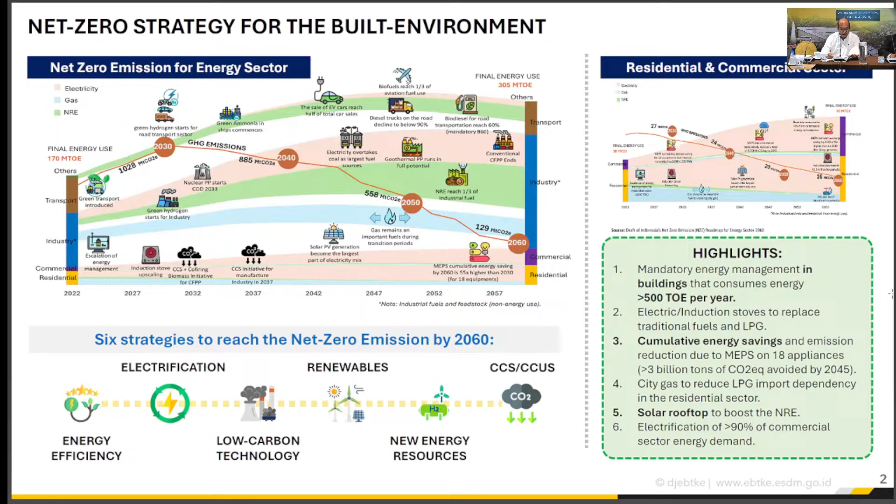This commitment is backed by our national policy roadmap, including the enhanced NDC, which outlines an ambitious emissions reduction of up to 31% by 2030, at which the energy sector is expected to contribute significantly, reducing emission to 129 million tons CO2 by 2060.

To operationalize these goals, the government has enacted Government Regulation number 33 in year 2023 on energy conservation, followed by Ministerial Regulation number 8 and also number 3 in year 2025, introducing mandatory energy management for buildings consuming over 500 ton oil equivalent annually.

On the green building side, we have Government Regulation number 16 in year 2021 and Ministry of Public Works Regulation number 21 year 2021, mandating energy and water efficiency standards for buildings larger than 5,000 square meters. These are not just regulations, they are cornerstones to building a resilient and efficient urban future, especially for dense cities like Jakarta.

Looking ahead, the concept of the net zero energy building may become an alternative solution for the building sector, particularly for the non-residential areas. The application of net zero energy building means significantly reducing annual energy consumption while maximizing renewable energy generation without compromising comfort and building function.

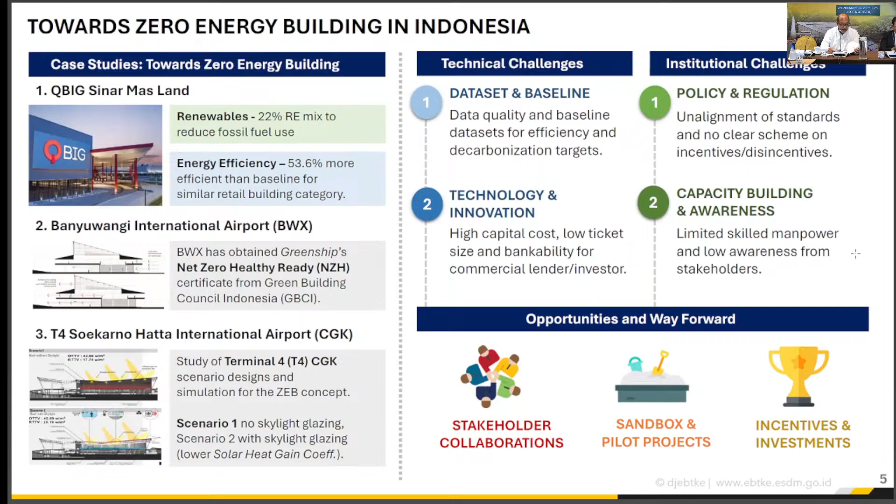Lastly, we hope this seminar will mark an early step toward all of those directions. Moreover, we hope that it can also address the challenges in capacity building and awareness by enhancing education and outreach, especially to the local government, commercial building owners, and other relevant stakeholders. Let this be our platform today to discuss further about zero energy building as a future possible option to decarbonize buildings across Indonesia. Thank you again for your engagement and collaboration. I look forward to the fruitful discussion. Thank you very much.

Thank you, Pak Hendra, for the wonderful remarks. Next, we are honored to be joined virtually by Mr. Masaki Kamiura from METI Japan, who will also share his remarks. Mr. Kamiura, the screen is yours, sir.

Hello, good morning. Can you hear me? Yes, clearly. Thank you very much. I'm Masaki Kamiura, Assistant Director for International Affairs Division, METI Japan. Today, Director Yoshino was scheduled to give this speech here, but since Director Yoshino is in the process of handling other official business, I will make an intervention on his behalf.

First of all, I'd like to express my sincere congratulations on this workshop, based on the various cooperation on energy efficiency and conservation between Indonesia and Japan. At the same time, I'd like to express my sincere gratitude to the Ministry of Energy and Mineral Resources, the Ministry of Public Works and Housing, and the City of Jakarta, Indonesia. Thank you for supporting this workshop, as well as all speakers and participants and all those involved in organizing it. On behalf of METI, I'd like to say a few words for these opening remarks.

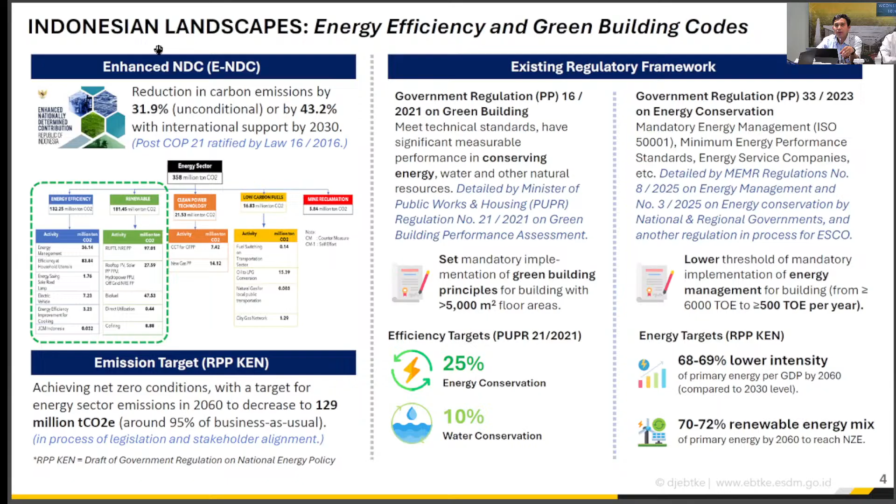We also have another government regulation on green building, which may have a different approach, like the principle with floor areas, different from our approach. It means that if we calculate the energy with PUPR, they calculate the floor areas, but the two regulations should hand in hand, so it should be aligned together to achieve the energy efficiency target.

Next slide. In terms of energy efficiency regulations, we have also established government regulation number 33 2023, that consists of a lot of programs, including energy management, minimum energy performance standards, implementation of energy service companies, and also how to encourage the participation of the private sector, maybe for funding, capacity building, and also research and innovations and partner collaborations. With this regulation, of course we also have monitoring and evaluation in terms of the building sectors.

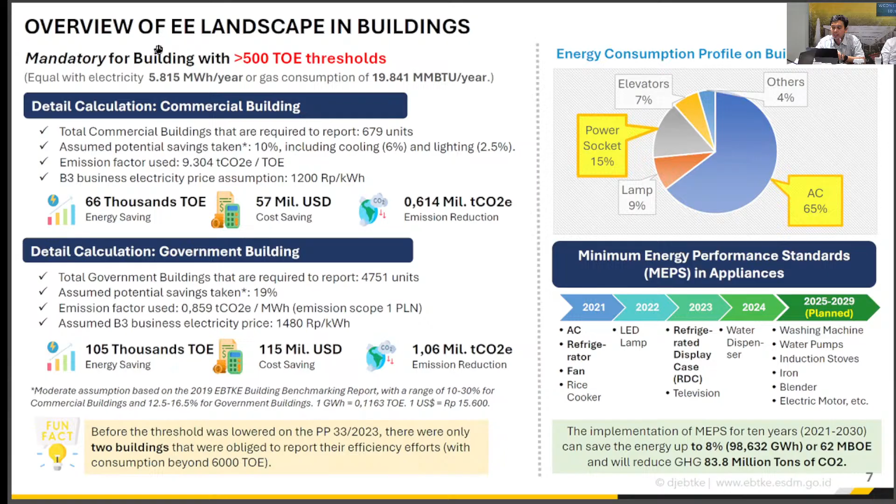In tapping into this potential savings, we need to identify practical solutions to mobilize clean energy financing, including through the promotion of energy service companies, or ESCO. The presence of ESCO hopefully can assist companies in performing the investment grade audit, encourage energy efficiency project financing, implementation, operation and maintenance, and measurement and verification of energy performance. We also encourage the development of energy service companies.

And in 2024, there are some ESCO companies here that already collaborate with us. Next slide.

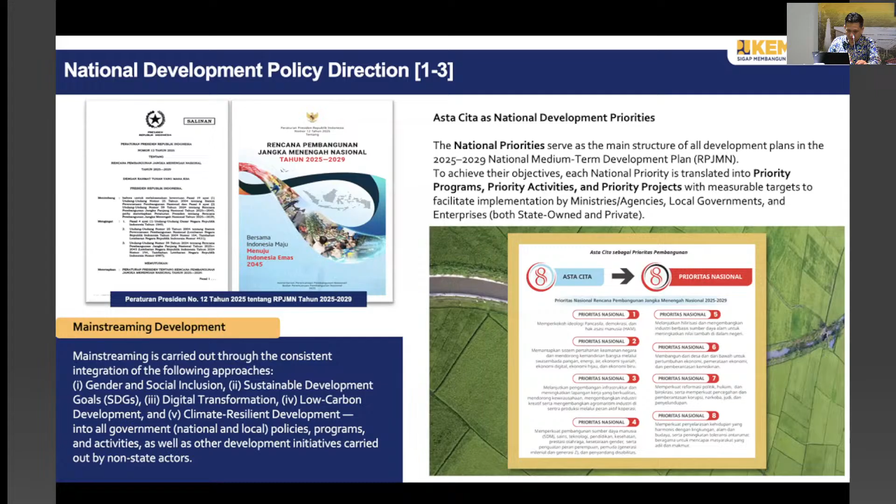In National Development Policy Direction, in support of national priority, six medium-term development targets have been formulated to help ensure success during the 2025 to 2029 period, one of which is realization of green economic transformation.

In the 2025 RPJMN development matrix, green building implementation is listed under priority project, which we call PROP: project priority implementation of sustainable construction and green buildings. Green buildings are part of the national strategy to support the transition toward green economy and low carbon development. They serve as an implementation instrument to realize a green economy and low carbon development, promote resource efficiency and energy conservation, reduce greenhouse gas emissions from the energy sector, and promote sustainable construction in Indonesia.

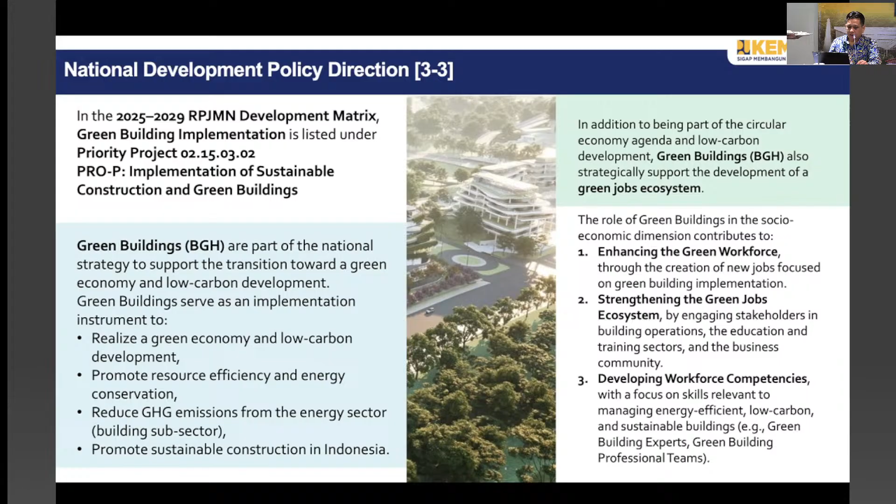In our regulation, as mandated by government regulation number 16 year 2021, green buildings aim to achieve a minimum of 25% energy conservation in mandatory buildings and 10% water conservation.

The key stakeholders in green building implementation are four: building owners, managers and users; central government; regional government; and construction services providers.

For government buildings, our regulation sets a minimum of 5,000 square meters. This is mandatory for government buildings to implement green building under our minister regulation number 21 of 2021.

We have priorities divided into 3 terms in our roadmap.

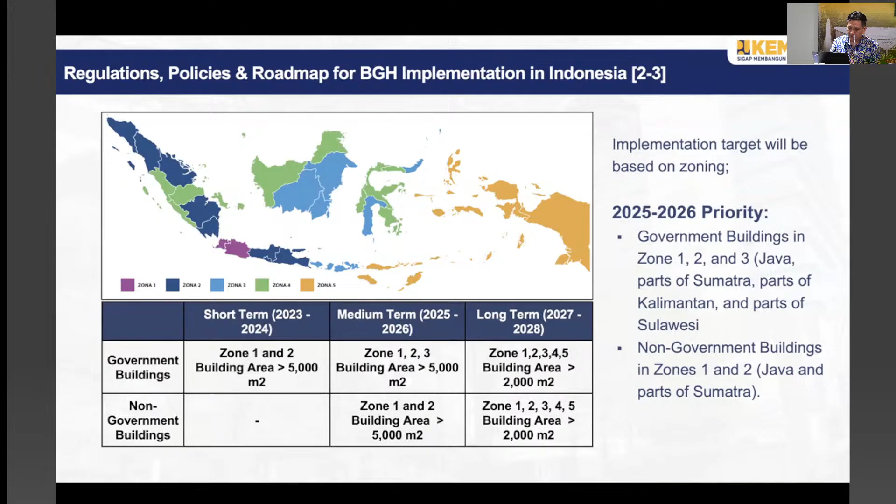This is the task of our secretariat: we develop regulation, empowerment, and supervision. For regulation, we are responsible for regulation and policy, and building priority determination. For empowerment, we are tasked with capacity building of green building for all implementation stakeholders. We have supervision using an information system for buildings.

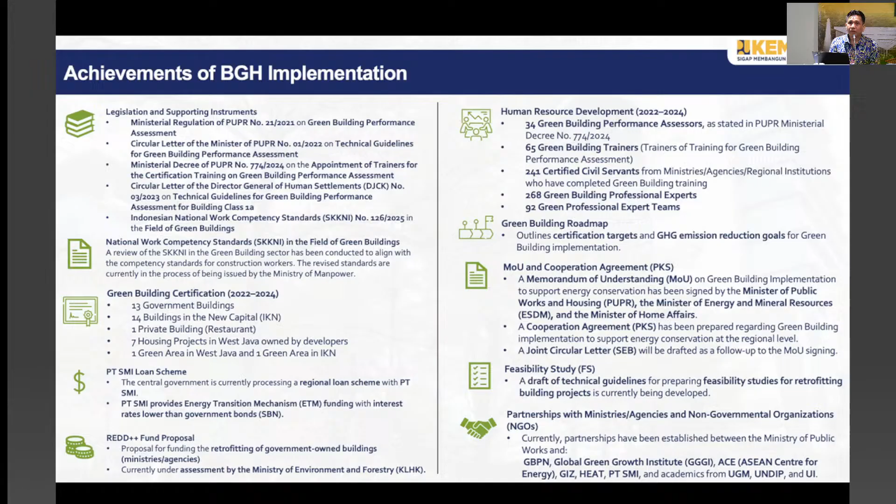This is in IKN, Ibu Kota Nusantara. All buildings in IKN are mandatory to be green buildings.

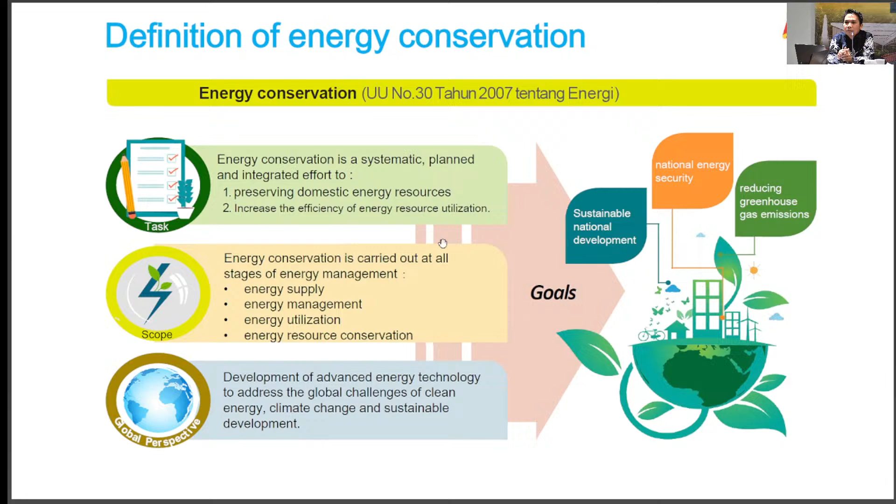I will focus more on what Jakarta Special Region has implemented in the energy management obligations.

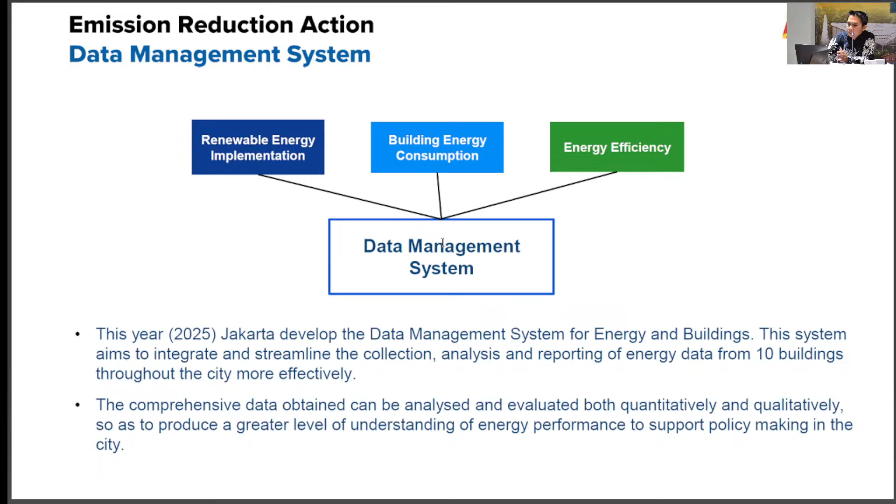For the buildings that we have audited, we also implement a data management system to improve the energy efficiency in those buildings, and we work closely with Gadjah Mada University for this data management system implementation. Next.

Jadi contoh sistem yang telah kita bangun dan juga peralatan-peralatan yang kita pasang di bangunan gedung milik kami, tahun ini baru dibangun 10. These are the systems that we have built for our buildings. There are 10 buildings where we have implemented these measures.

Di mana dari hasilnya tersebut dapat kita memantau konsumsi energi secara real time pada bangunan gedung yang telah kita pasangi alat data management system ini. From the system implementation, we can monitor the energy consumption of those buildings in real time.

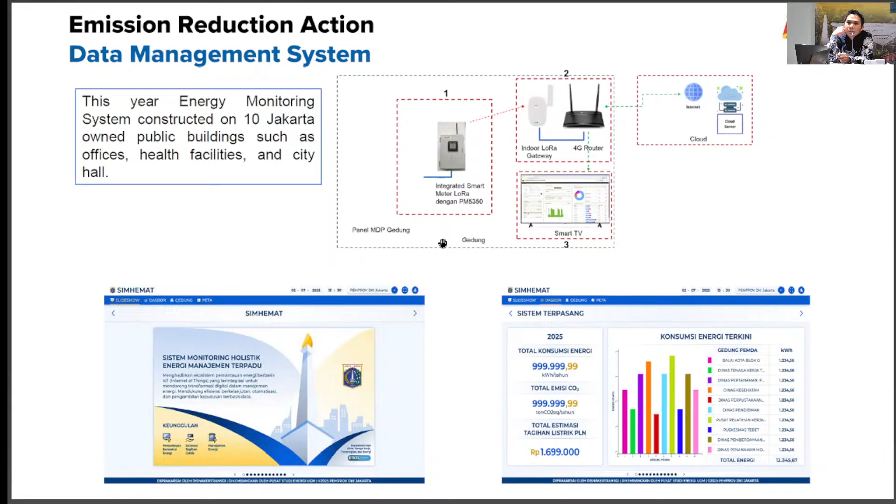Ya, dari sana tentunya ini bermanfaat bagi kami untuk menganalisa lebih lanjut terkait dengan konsumsi energi pada bangunan gedung. It is very beneficial for us to monitor the energy consumption of those buildings and decide which actions to take next.

Selain melakukan audit, juga kita melakukan aksi sosialisasi kampanye hemat energi itu melalui poster, videotron, dan stiker-stiker yang kita berikan ke bangunan gedung. Besides the energy audit, we also conduct several measures for energy efficiency, such as a save energy campaign through videotron, social media, banners, and stickers.

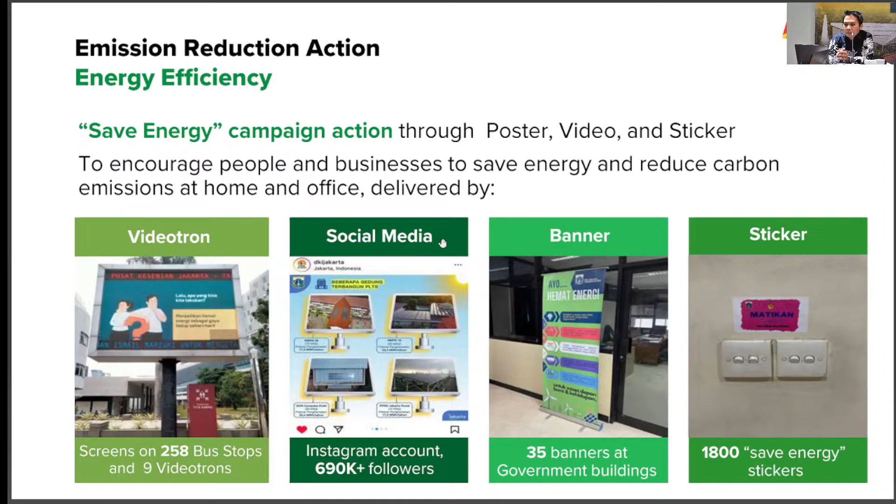Ya, ini kami juga menyelenggarakan beberapa seminar untuk mengkampanyekan penghematan energi di gedung-gedung. We conducted several seminars and workshops in our buildings.

Tentunya juga melakukan sosialisasi di 5 wilayah kota karena kami memiliki suku dinas tenaga kerja transmigrasi dan energi di 5 wilayah kota. We conducted the socialization in our 5 cities in Jakarta.

Selain melakukan audit energi untuk campaign, kami juga melakukan aksi sosialisasi dan implementasi pemadaman listrik selama 1 jam untuk menghemat energi. We also conducted a campaign to turn off your electricity in Jakarta for 1 hour, only 1 hour.

Earth Hour. Ya, jadi sampai saat ini sudah dilakukan sampai dengan 8 kali pemadaman itu dari tahun 2023 sampai 2025. Jadi per tahun itu 3 kali.

We have conducted this Earth Hour campaign about three times each year since 2023.

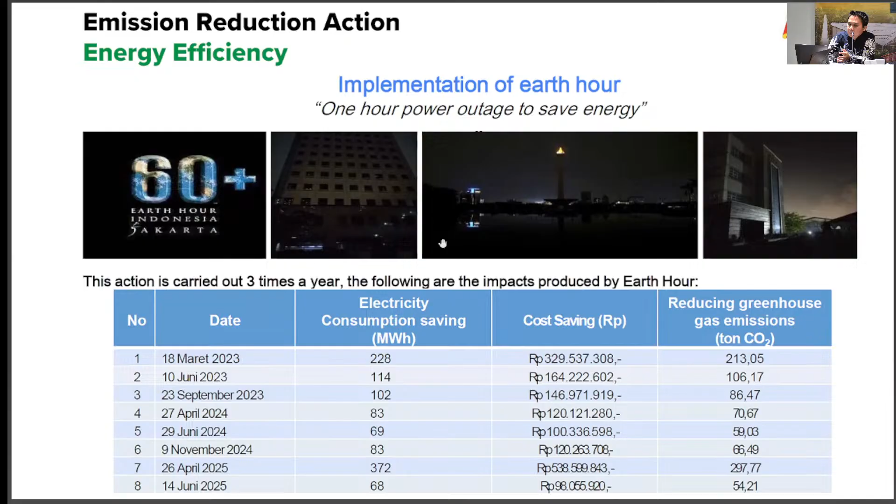Selanjutnya, selain itu juga kami juga mengimplementasikan pembangunan pembangkit listrik tenaga surya (PLTS) pada bangunan gedung milik Pemprov DKI Jakarta. We implemented solar panels in governmental buildings in Jakarta's provincial government.

Sampai 2024 itu sudah terbangun 164 PLTS pada bangunan gedung dengan total kapasitas 4,01 megawatt peak. We have implemented solar panels in 164 buildings that reach a capacity of 4.01 MWp.

Bangunan-bangunan yang kita bangun solar panel tersebut itu merupakan bangunan milik pemerintah DKI Jakarta berupa sekolah, kantor, fasilitas kesehatan, dan sport facilities atau gedung olahraga. We implemented solar panels in buildings owned by Jakarta, such as schools, offices, healthcare facilities, and sport facilities.

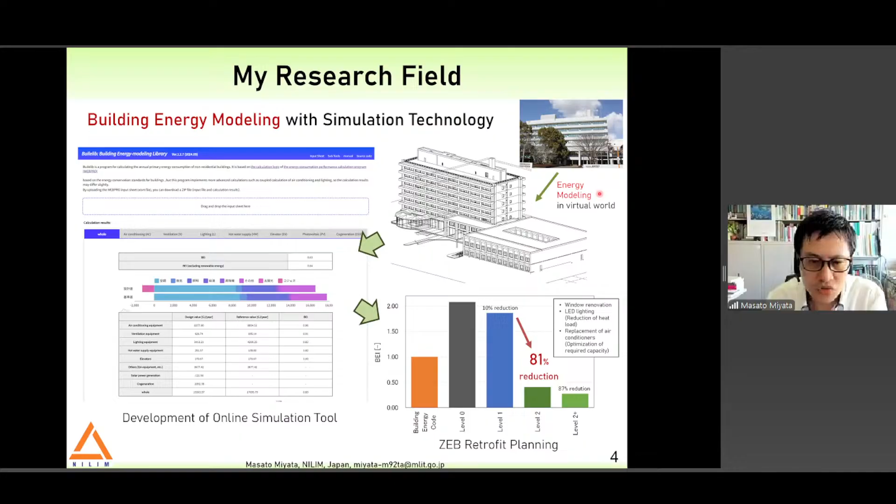My research field is building energy modeling with simulation technology to achieve energy saving and decarbonization of non-residential buildings. For example, I'm now developing online energy simulation tools and conducting research to plan retrofits for real buildings. That's all my institute introduction. First topic is the building energy code in Japan. I'll talk about the details of the code.

This is an overview of regulation on building energy efficiency of buildings in Japan. The Ministry of Land, Infrastructure, Transport and Tourism (MLIT) is responsible for the design and construction of buildings, while the Ministry of Economy, Trade and Industry (METI) is responsible for the operation phase. Today I will focus on the design and construction phase.

In order to achieve energy saving in the building sector, the Building Energy Efficiency Act was promulgated in 2015. This act defines a building energy code to strengthen energy conservation measures at the design and construction phases. The building energy code is divided into two categories: one for residential buildings, another for non-residential buildings.

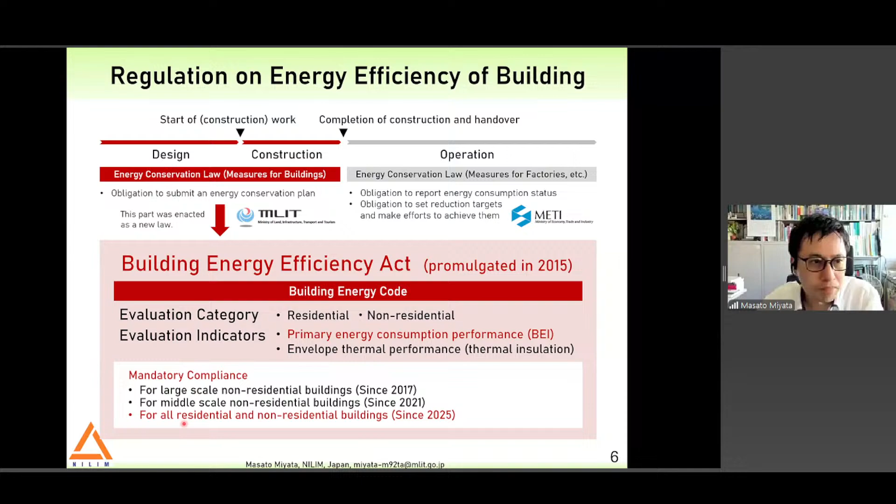This slide provides a more detailed explanation of the building energy code for non-residential buildings. This code evaluates building energy performance at the point of design and is linked to the building permit application. The code consists of two parts: the primary energy performance standard and the envelope thermal performance standard.

The evaluation indicator for primary energy performance is BEI, the Building Energy Index. BEI is the estimated design primary energy consumption divided by the regulated standard primary energy consumption.

The evaluation indicator for the envelope thermal performance standard is PAL star, the perimeter annual load. It's a kind of heat load, cooling and heating load. I'll explain more later, but we provide an online evaluation tool to calculate these indicators, BEI and PAL star.

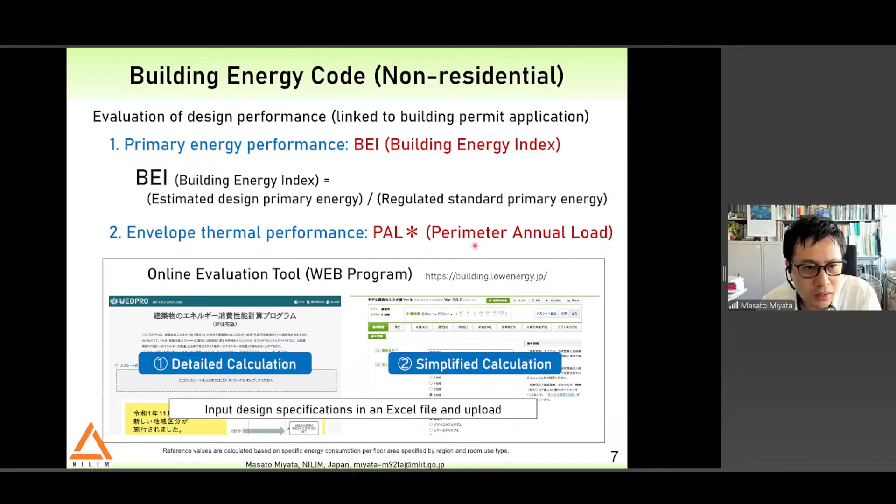This slide shows the elements of the building to be evaluated. For primary energy performance, the evaluation targets are the air conditioning system, mechanical ventilation system, lighting system, hot water supply system, elevator system, and we include energy generation systems, for example photovoltaic power generation and cogeneration systems.

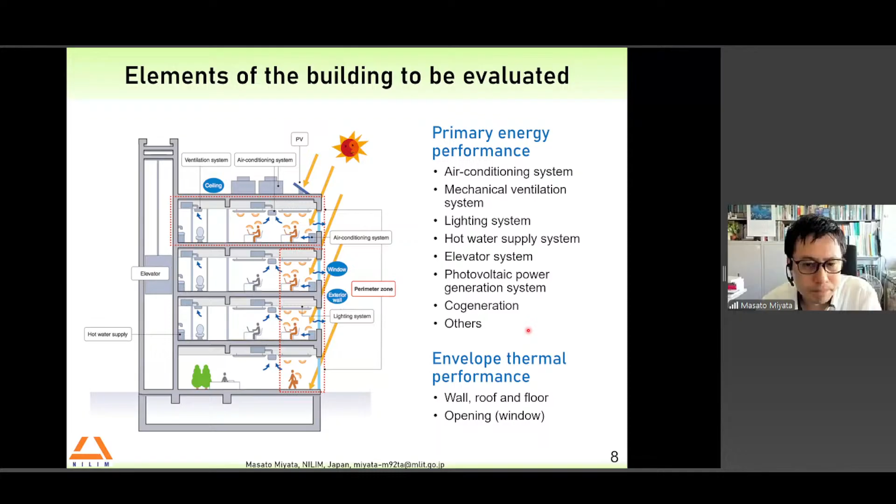Why does the code request to evaluate the design performance? As you know, buildings are constructed individually, different from industrial products like cars. No two buildings are the same, so energy consumption in buildings largely differs depending on the quality of the design. So we should pay more attention to the design performance.

Building owners sometimes, let's say always, make excessive demands on building equipment because they usually have a dream of a very successful business, so requests tend to be too much, that is, overspec. Another reason is that they are afraid of receiving complaints from customers. But the important thing is bigger isn't always better, so excessive equipment causes energy waste. The building designer needs to show and explain the energy performance as a result of providing buildings that meet the required demands.

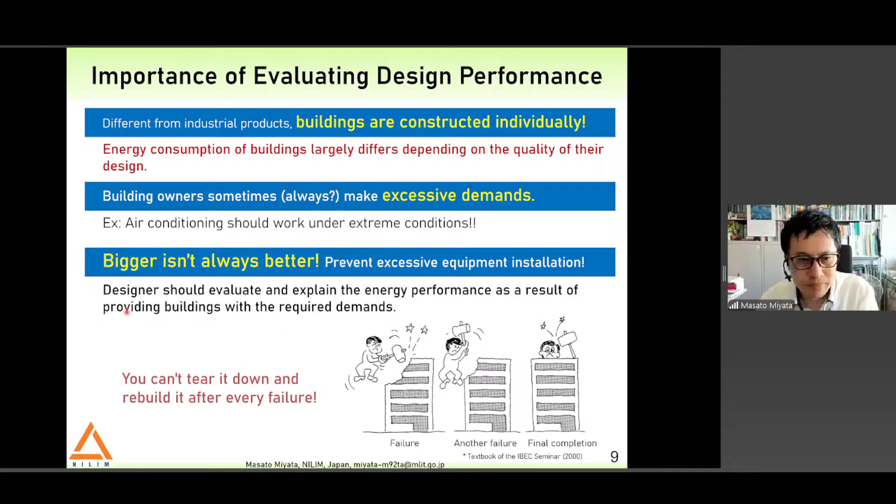The next topic is about the standardization of the evaluation method. As I talked about before, the indicator for primary energy performance is BEI, Building Energy Index. BEI is the design primary energy consumption divided by the standard primary energy consumption. If the BEI is less than 1.00, the building is considered to be in compliance with the code. So here the question is how to calculate these energy consumptions.

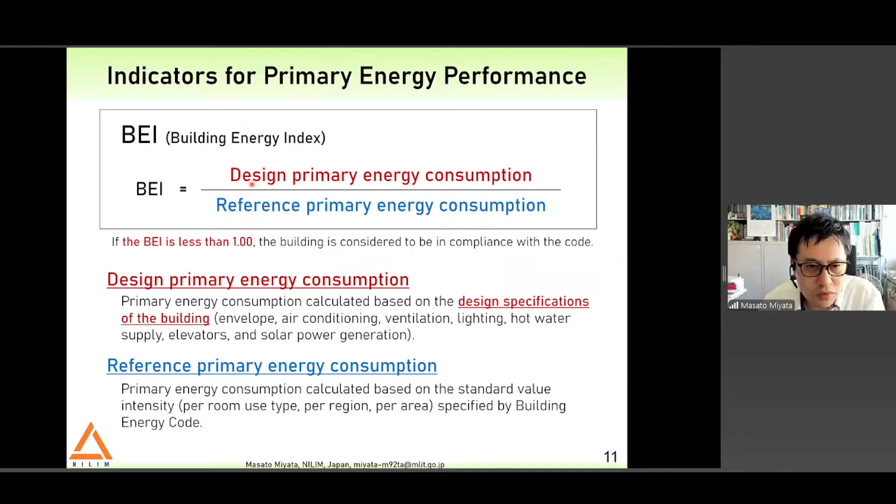NILIM and BRI, the Building Research Institute, a kind of sister research institute, have developed a new simple calculation method that fits in with regulations. The methodology is expected to be suitable for the mandatory standard. Our goal is that people can evaluate with minimum input and understand the calculation process, so we try to keep it as simple as possible.

The calculation method is simple, but the scientific theory behind it is very solid. We did many experiments in actual facilities in our research institute and tested the actual performance of the equipment many times.

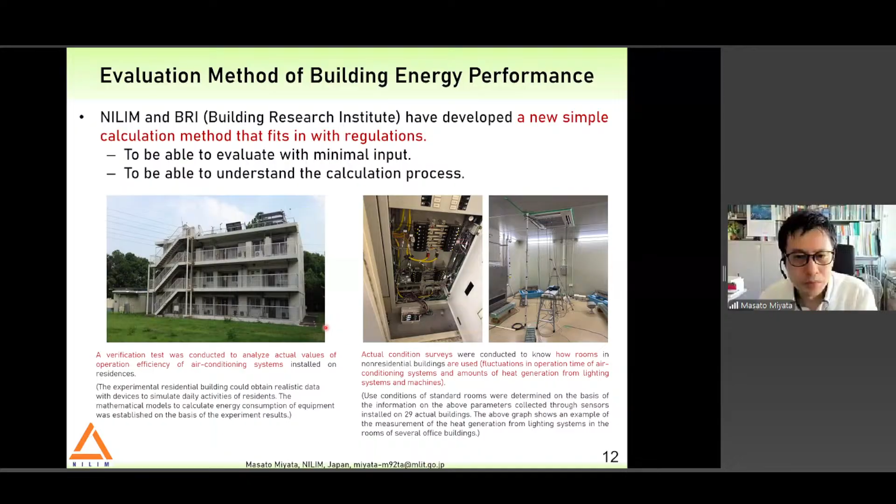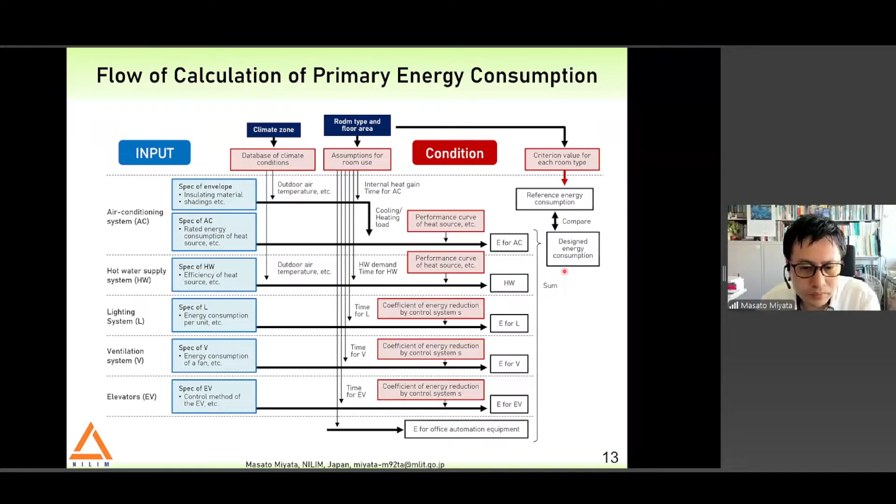This slide explains how the reference energy consumption was determined. In 2013, we surveyed the design specifications of representative buildings in Japan and established a reference specification for building envelope and equipment design. Using these specifications, we can calculate the reference energy consumption based on the calculation method we developed. The calculation method, including weather data and operational schedule, is the same as used for calculating design values. Therefore, we can say the BEI of 1.00 represents the standard energy performance level as of 2013.

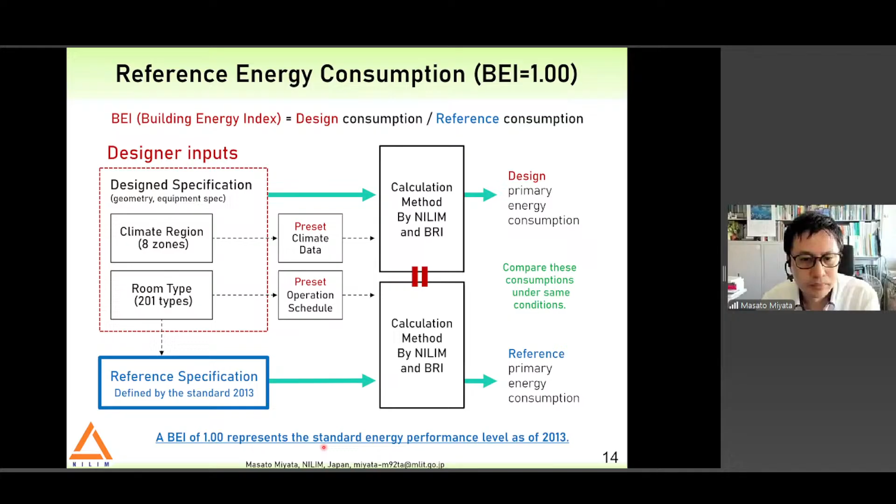We developed the calculation method of primary energy consumption, but the calculation work is very time consuming. Japanese conventional application requires manual calculations. The manual calculation of coefficients using tables was very complicated and time consuming, and it's difficult to review or verify all calculation procedures of applicants.

So we developed the automatic calculation program, an online tool. The Japanese government developed this kind of program to enable reviewers to verify calculations by checking their input only. The accuracy of calculation has been guaranteed by the Japanese government. We call this program WEBPRO, because it runs online. This program is publicly accessible and free for use.

We provide three kinds of programs. A is a detailed calculation, used by those who want to make a detailed evaluation and get a high score. B is simplified calculation; fewer inputs are required than method A, and the evaluation can be done easily. More than 95% of users choose method B. C is the limited edition, for buildings less than 300 square meters.

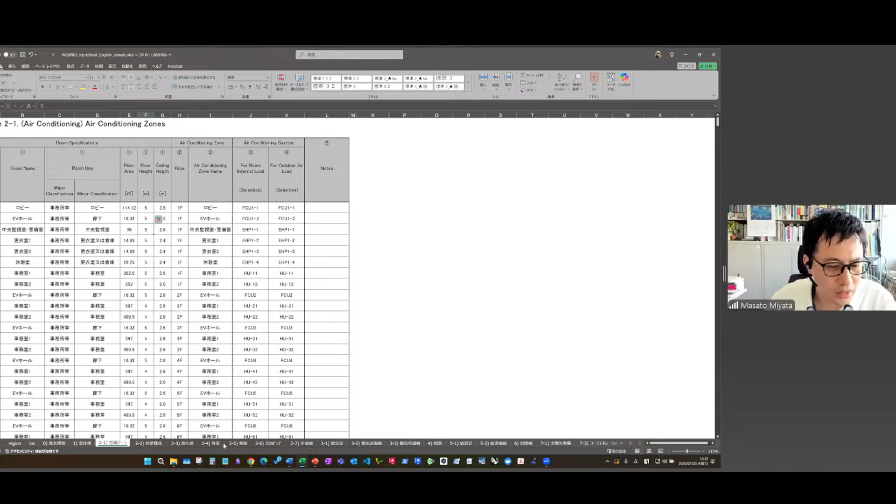This is the Excel file that serves as the input file for the program. There are several sheets in the file; sorry, it's in Japanese, but the headers are translated into English. For example, this is the input sheet for room specifications. You have to input the floor, room name, and building use type. You have to select the type of building use; this means office. This is the room type, like corridor, lobby, or office room. And floor area, floor height, ceiling height, and so on.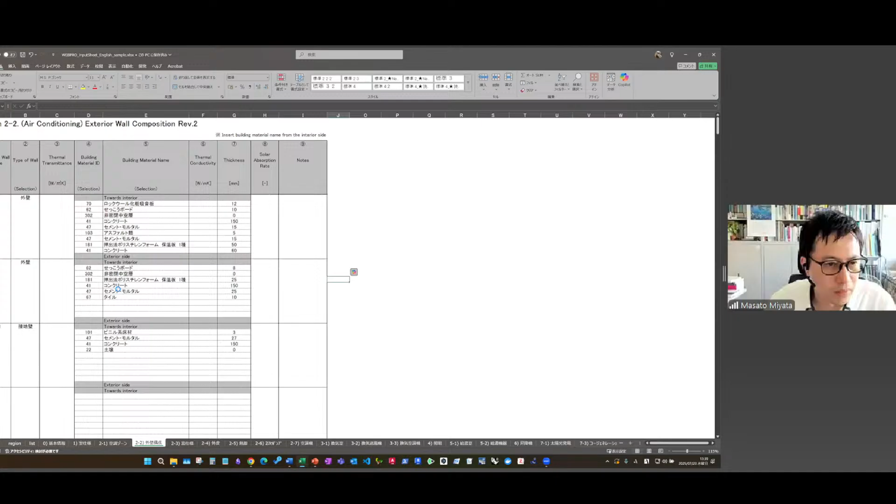This is the sheet for exterior wall compositions, showing rock board, the air layer, concrete, or something, and you have to input the thickness of the materials.

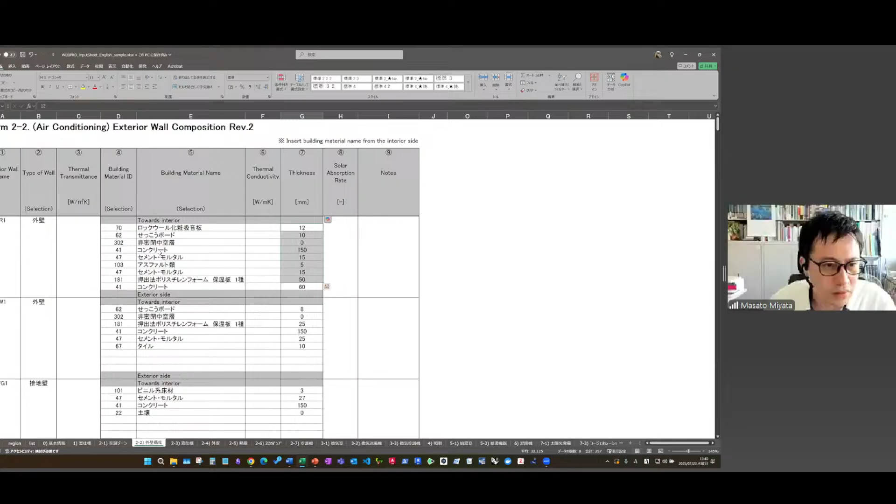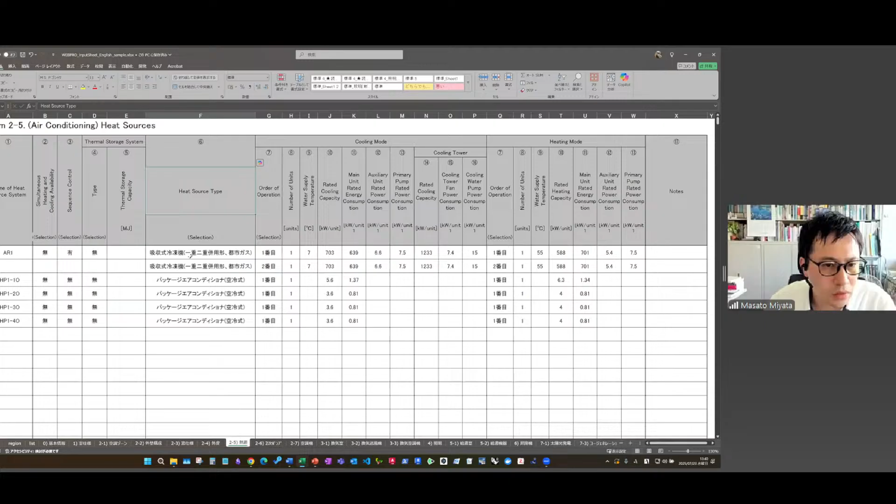Another example is this sheet for heat sources. You have to select the heat source type, this is the absorption chiller, and input the rated capacity, cooling capacity, rated energy consumption, and so on. And this means a package air conditioner.

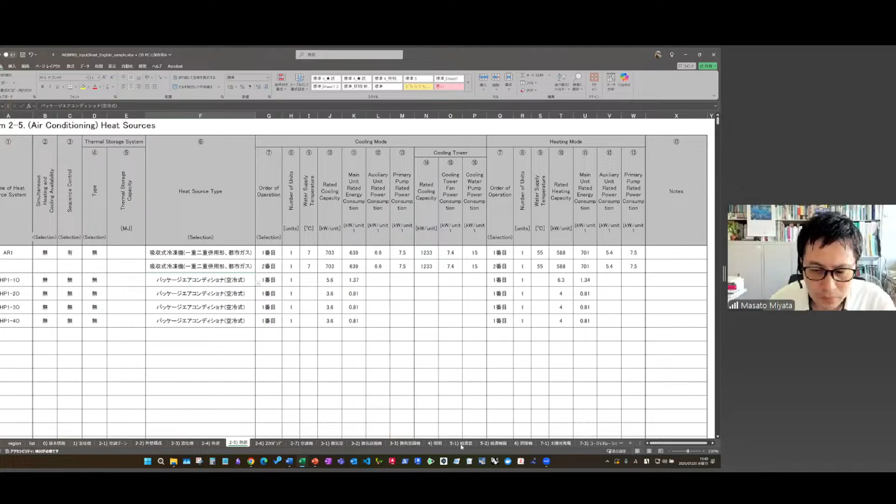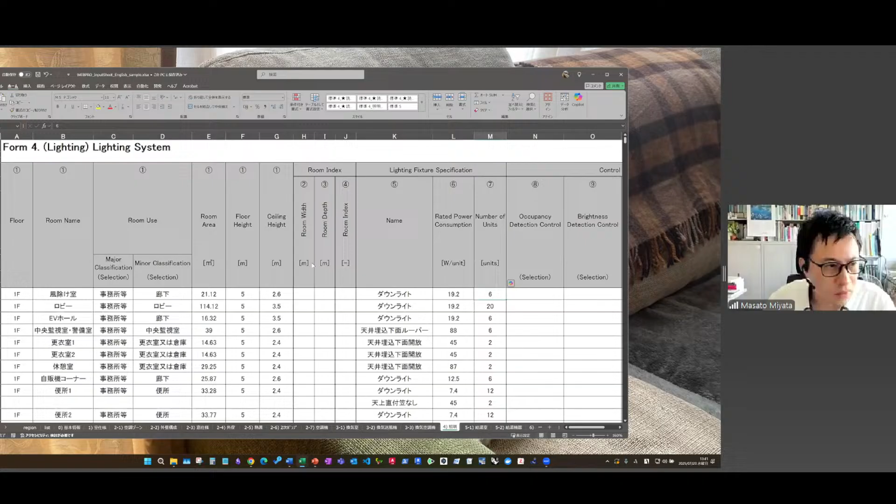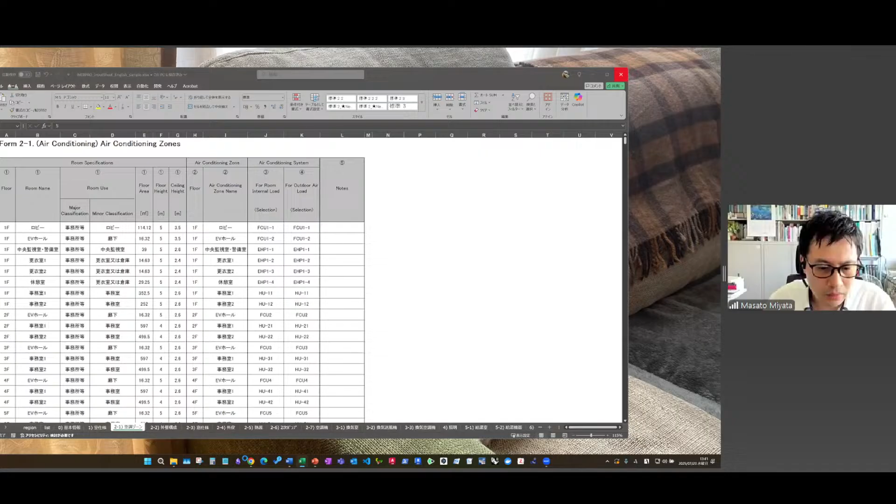So you can get the score. The calculation takes only less than 5 seconds.

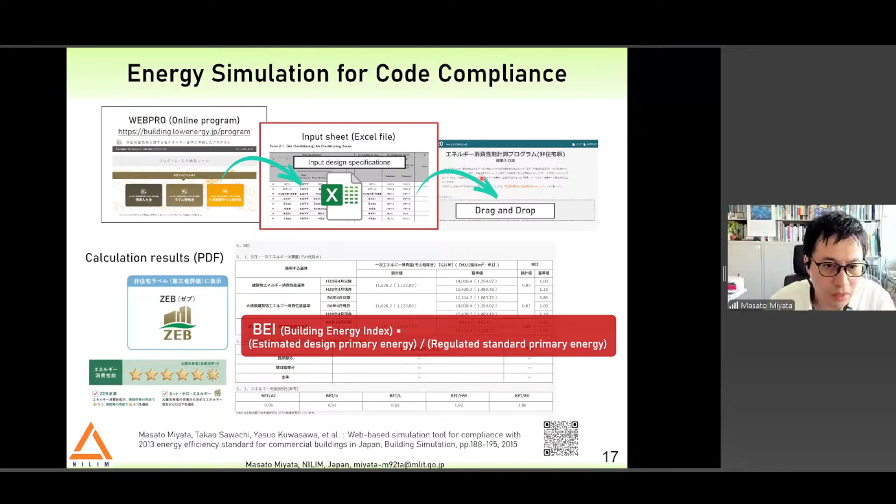This program is also linked to BELS evaluation. BELS is the building and housing energy efficiency labeling system in Japan. So once the BEI value is calculated in the BELS program, the label, this kind of star rating, can be obtained depending on the BEI value. The label should be displayed at the time of sale and lease of the building. BEI is also linked to the ZEB, Zero Energy Building certification.

Okay, last topic is collection and analysis of application data for building energy code. So I explained WebPro, but besides calculating BEI, WebPro has an important role to play.

It is automatic collection of application data. Information inputted into WebPro and calculation results are stored in an online server. The evidence data needed for discussion when revising energy policy in the Japanese government is automatically collected.

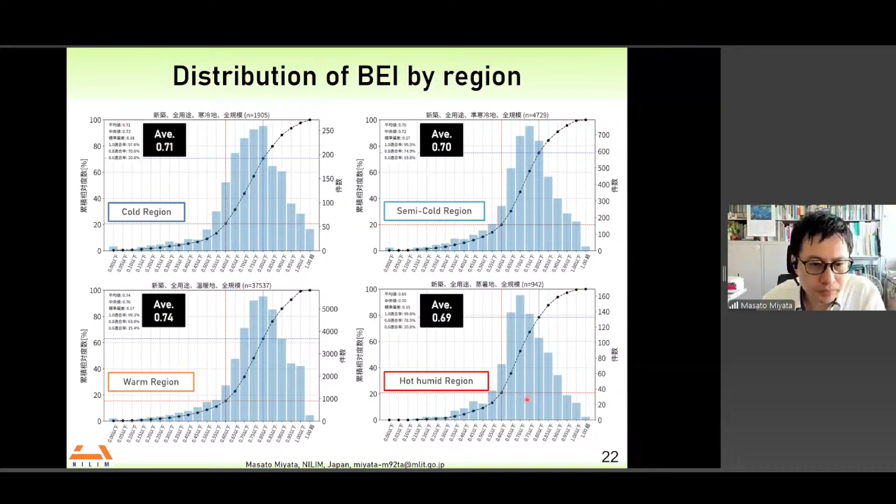In this way, status of compliance with the code can be checked in real time. Analyzing this kind of evidence data, the Japanese government is strengthening the building energy code year after year.

Last year, 2024, the code for large scale buildings, commercial buildings, was strengthened by 20%. Starting in 2026, the code for medium buildings will be strengthened by 20%. Our final target is, by 2030 at the latest, to raise the code to ZEB level.

In Japan, this kind of evidence data allows for rational discussion and streamlines policy decisions.

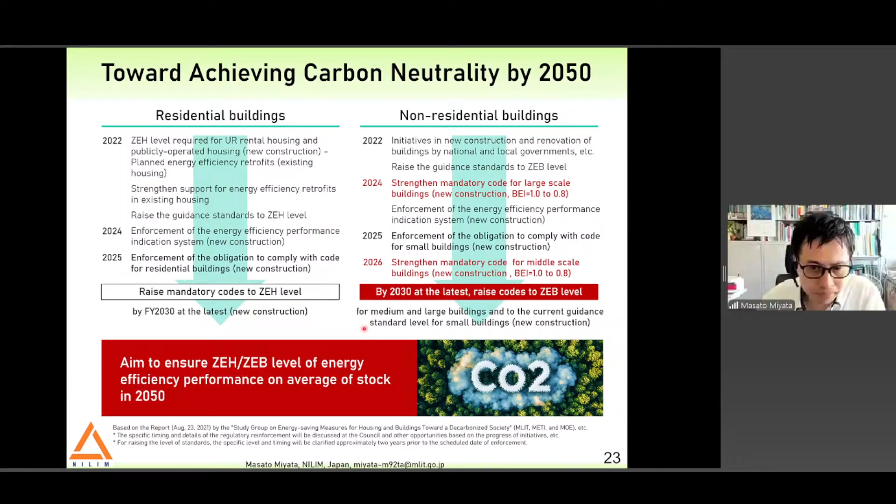In addition, information on the relationship between BEI and design specification is disclosed to designers and building owners. Grouping by BEI is in 5 categories: BEI 0.6, 0.7, 0.8, 0.9, 1.0. And we analyze the relationship between the BEI value and the envelope, the thermal transmittance of the exterior walls.

In this way, in Japan, simulation tools are not merely tools for calculation of BEI, but function as data collection devices and promote energy conservation in buildings.

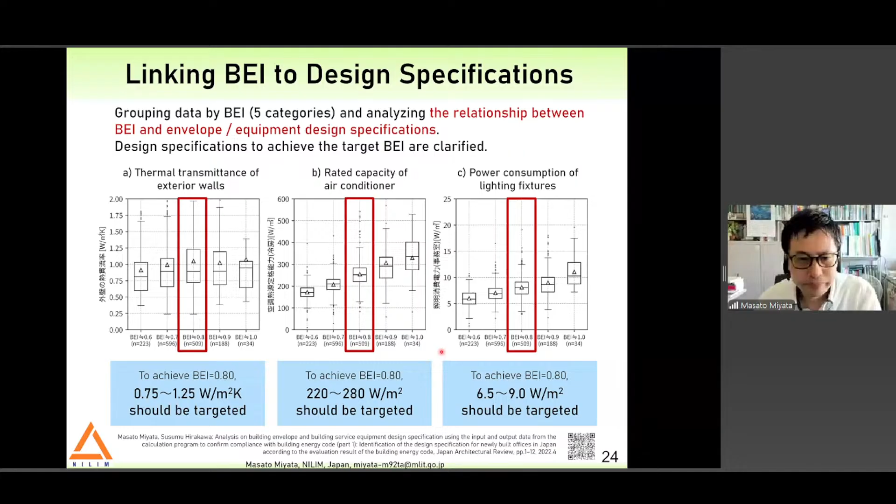So in order to apply regulations more effectively and efficiently, digital transformation of the regulation is important. We have developed standards for building energy evaluation methods and an online software called WebPro.

WebPro also functions as a data collection device. I wasn't able to speak today due to time constraints, but it's a powerful tool not only for new construction buildings but also for existing buildings - that means ZEB retrofit projects.

Now, I think this kind of approach can be applied in your country, so I'm happy if our experience could assist you. Okay, that's my presentation.